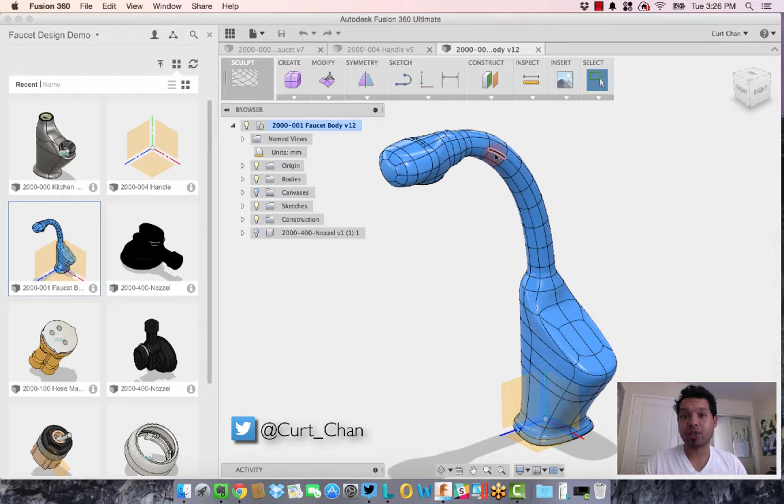And with that, I want to continue on with my faucet design. If you missed the first segment of how I created this sculpt feature, go ahead and click the link at the very top and you'll be able to see the first part to this faucet design. So let's go ahead and jump right in.

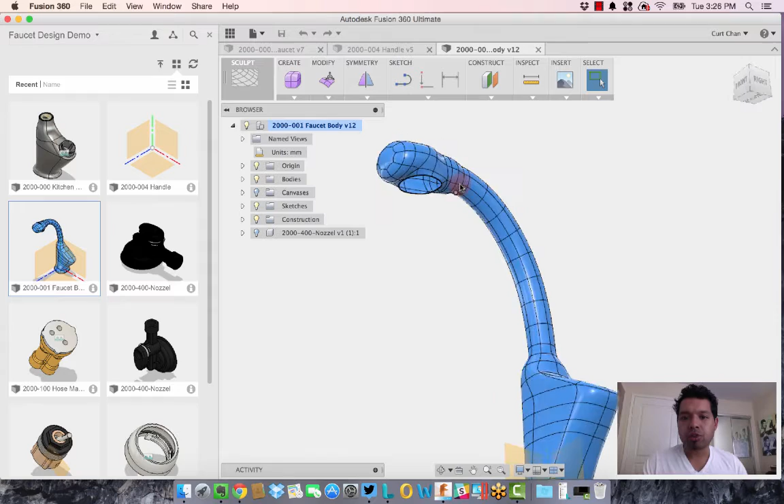Number one, if you guys remember, I made an opening at the very bottom of the headpiece of where the nozzle might go. The beauty about using Fusion is the ability to collaborate, and even open up multiple CAD files. In my folder, my project for faucet design, I actually have multiple components I'm going to be working with here. I want to show you just how easy it is to bring a component from another design or something you created in another file.

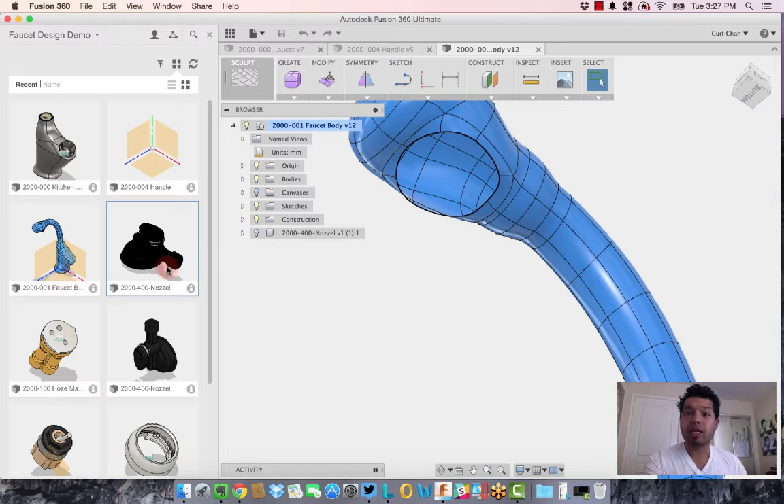All you got to do is right click on the design you want, say insert, and it's going to place this guy right in. Any changes that are made will update the version right inside of the data panel, so you always have the latest version there.

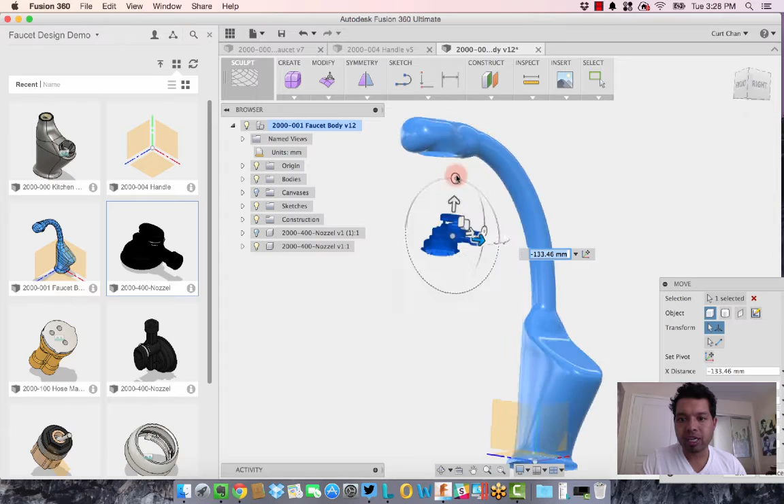So as you see here now, I just dropped this design that we have of the nozzle. I'm going to go and orientate it correctly of how I want it to be, because it needs to really sit right within this guy and hopefully fit snug right in there.

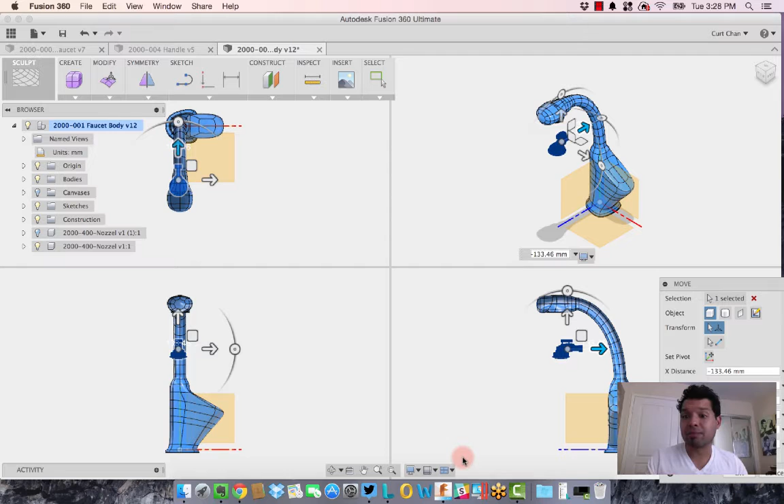Now there's something key I want to show you, and this came out with our latest release. I'm going to minimize the data panel. The slick thing is if you come to the very bottom where it says viewports and click on that, you can go to multiple views. This gives me a quadrant of 4 different areas, so I can look at the top, front, right, and isometric. The nice thing is I can physically zoom in and really take a look at positioning, seeing where this nozzle is in all relative space.

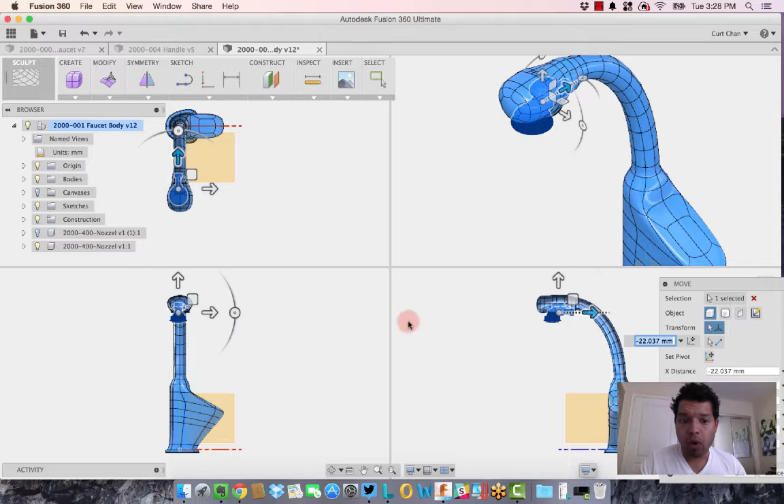So if I come to this bottom view, I can grab it, translate it, rotate it, get it positioned exactly how I want it to go. If I want, I can come over to another view, zoom right in, and we can see things are looking clean of how I want it to be. Pan right over, and really it's all about positioning.

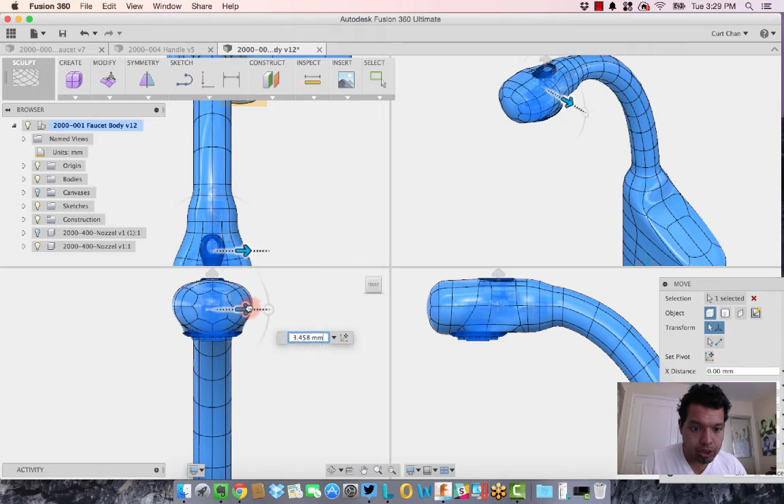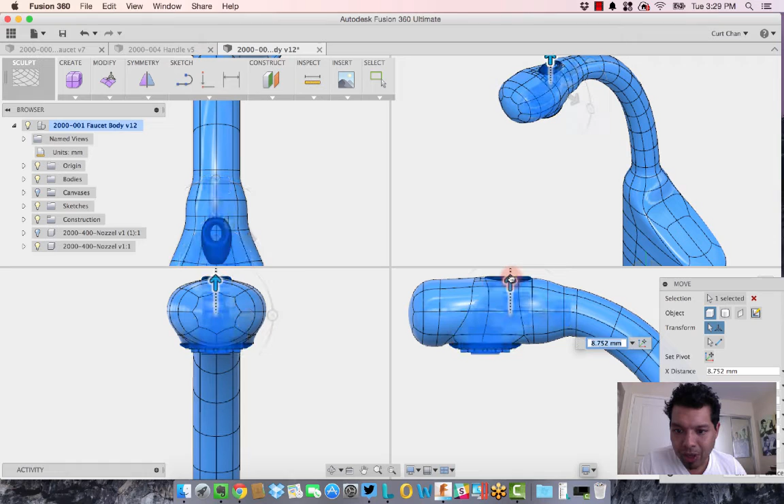So you can see it's kind of not centered, and that's the nice part about using the multiple view section—I can really see what's going on in all 4 views, and things are starting to look really good. Even if I zoom in on this area, it's not sticking out all the way how I like it. I can translate it up a little bit more, move it down maybe even a little further, however I want it positioned. Really it's just me playing the game of how clean do I want this guy to look at the end of the day.

Now I'm going to say okay and hop right back over to my viewport. One last thing before I hop back to the original one window—you see this little monitor where it says display settings. If I click on that, I can change the shade for each one, so I can look at it with no hidden lines, hidden lines removed, or shaded with edges, all depending on which angle or view I'm looking at, so it actually looks super clean that way.

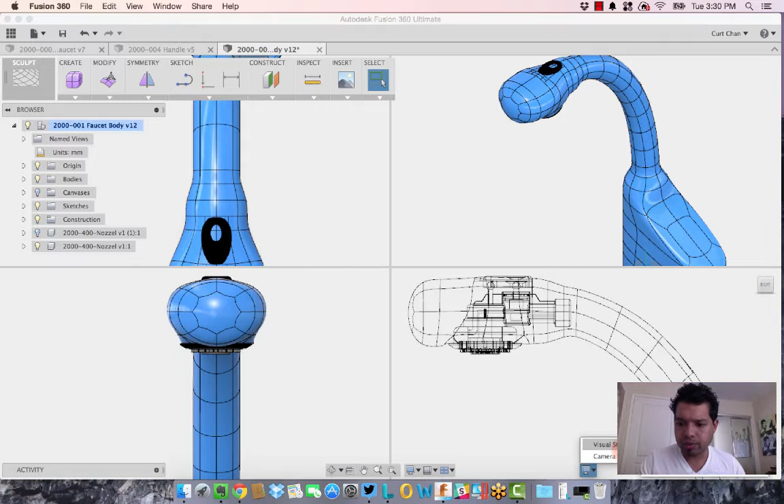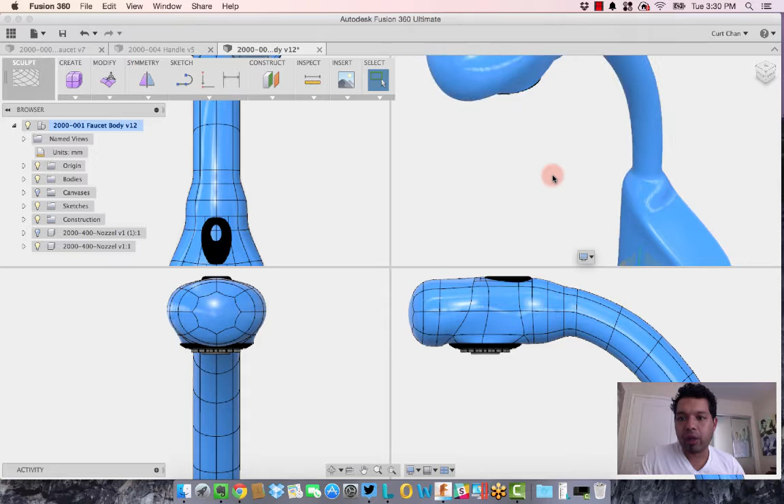Let me go back—I think I used shaded with hidden edges, there we go. Let's actually go with shaded with visible edges, that's the one I want. So now depending on which one I click, it activates that display setting. I can change the camera view, go over to perspective with ortho faces, and get it exactly how I'd like it to be. So just kind of zoom out, and it's starting to look pretty good right there.

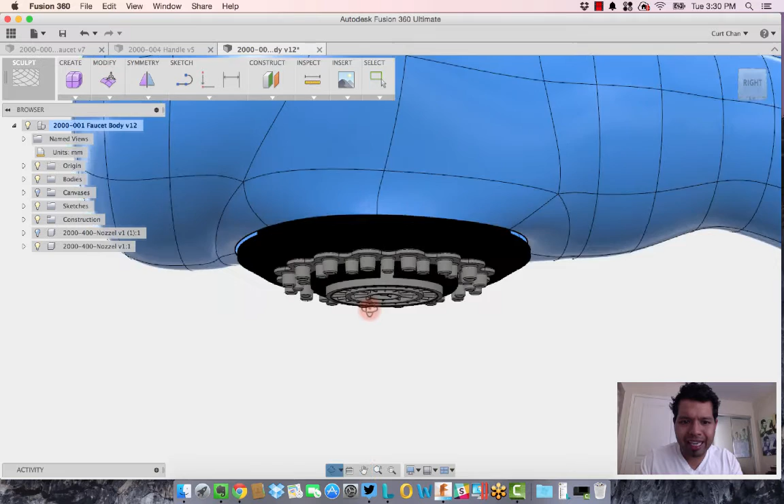So the next phase is just hopping back over. Let's go back to a single view, get that guy positioned how I want it to go. Let's take a look at the right view to see how this is. Zoom in, rotate around—see how there's kind of a gap in between the nozzle and the actual geometry. Since this is going to be a molded piece, and we used the sculpt environment to create the body of this faucet, I want this guy to really sit nice and snug.

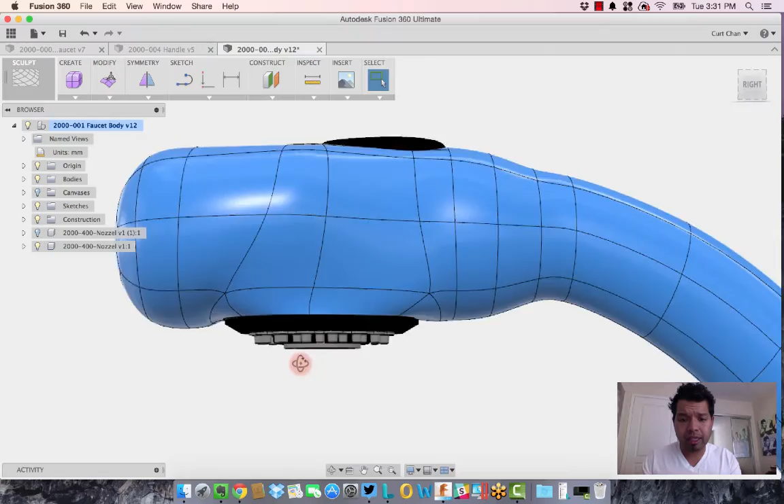Because when I industrial designed it, it was just kind of going with the flow of things. Now I actually have a component that I inserted, and it's not as perfect as I want it to be. So I'm going to show you a couple tricks in regards to working with the match tool, and we're going to take a look at it right down here under the modify command. The cool thing about this is I'm actually going to leverage the geometry of this nozzle.

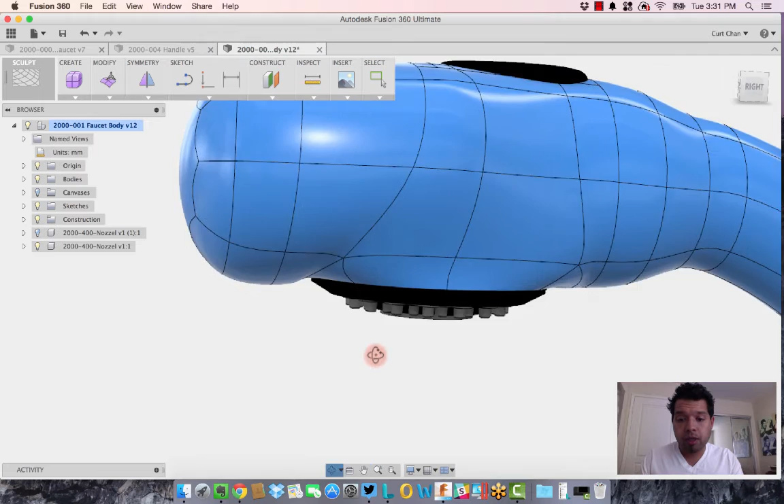So if I go ahead and create a new sketch, under sketch, create a sketch, I'm actually going to just pick this top outside face, or the top face of that nozzle. It puts me in the correct orientation that I want. Now the nice thing about this is I want that geometry.

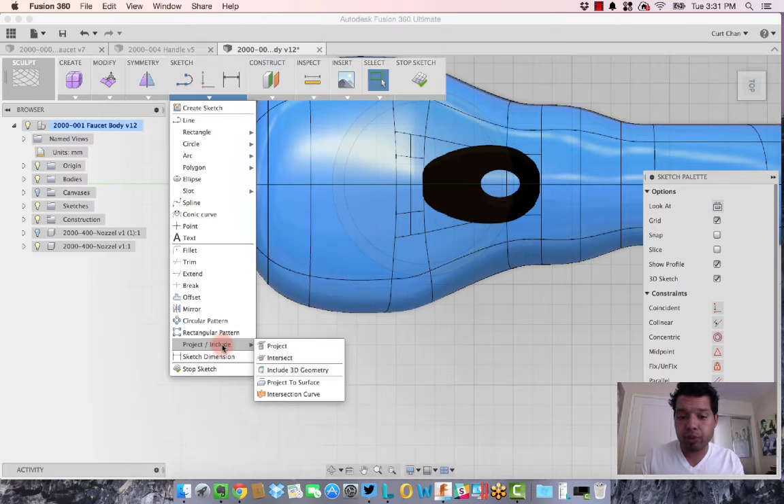So if I come down here under sketch, go to project — we've changed this around in the latest release — and just say project. It's going to take the geometry I have selected and project it onto that plane. Now if I go in and just hide this body that I have right here, and even hide the nozzle, you see how I have that geometry right there of that face I selected?

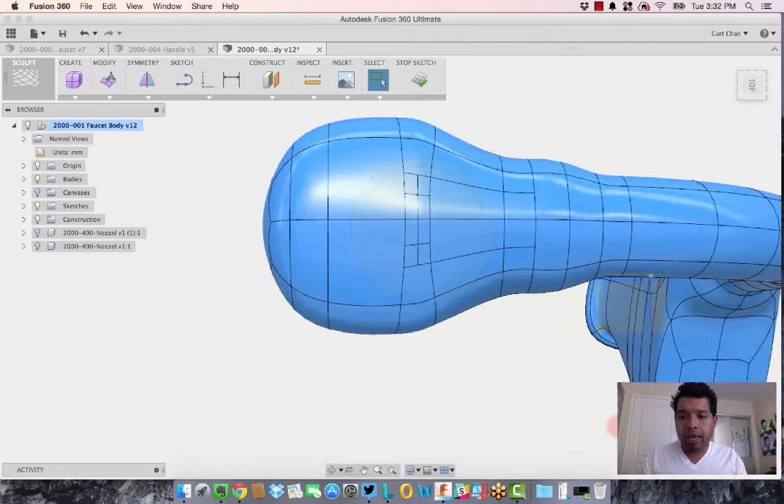Let me go and turn that body back on. And now if I rotate this guy around, you're going to see, see how I have the geometry and I can see that gap? Well, this is actually pretty slick, because if I come here to the bottom view now, what I want to do is kind of extend or match this outside edge to this outside profile.

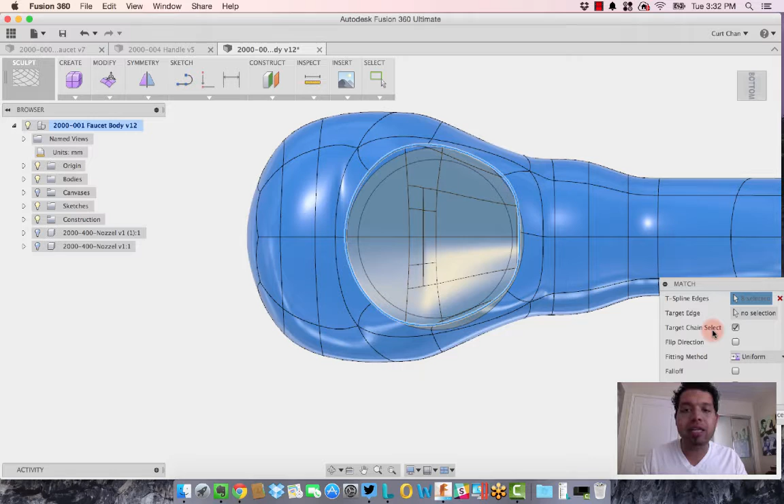So if I come up here to modify, drop down to match, what I'm going to do is select the T-spline edge. If I double click on that outside edge, it picks up the entire loop because I have target, tangent, chain selected. Then for the target edge I want to select the outside of this profile, just like that. Now it's going to match that outside edge to that profile I'm working with.

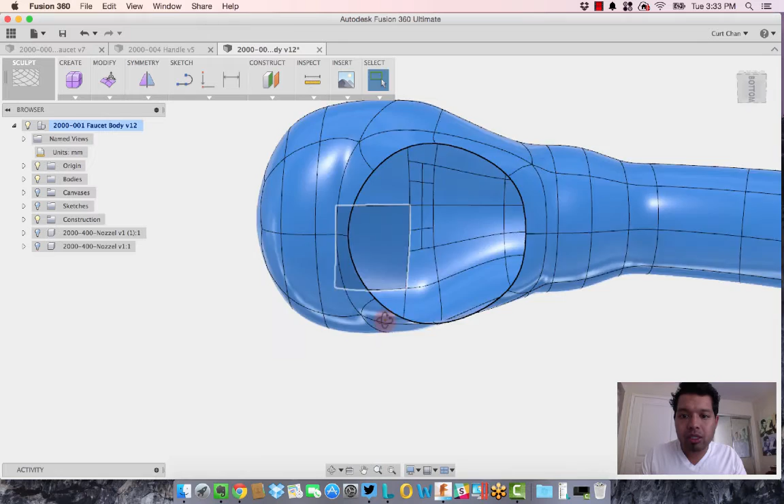So if I go in and say OK, now if you look at the geometry — let me turn off that nozzle so we can take a look at it — you can see just how clean that guy extends out to how I want it to be, so it's a nice snug fit. If I turn that nozzle back on, now you can see just how clean that is, all the way around, working with that match tool.

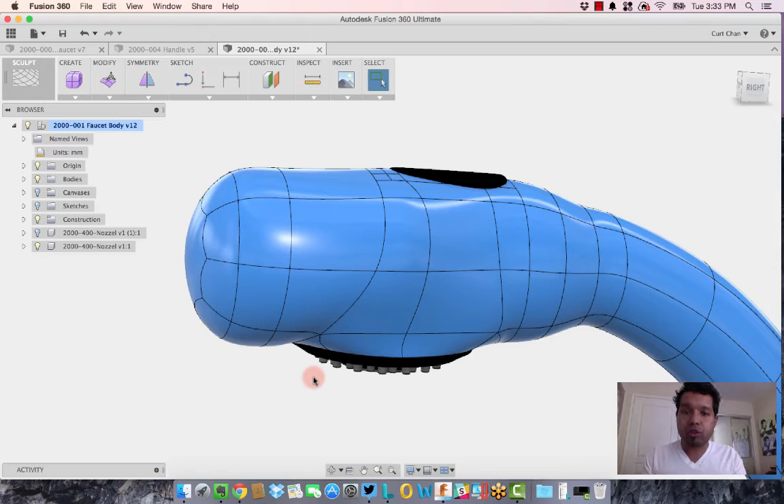So it's great to use to first start off with a sculpt design, then come in with another component, and then kind of get creative in that way. And of course, I can take that same approach at the very top for the top piece of the nozzle, using that match command. But let's go ahead and move forward now.

So if we go back over to my isometric view, let's take a look at it. A couple things too — I'm going to have to add a couple components here, and I'll hop over to that in a second. But the thing is this is still a T-spline body, because if I open up under bodies, you can see there's no thickness to this, right? So if I go under inspect, section analysis, pick that plane to section down, you can see there is no thickness to this T-spline.

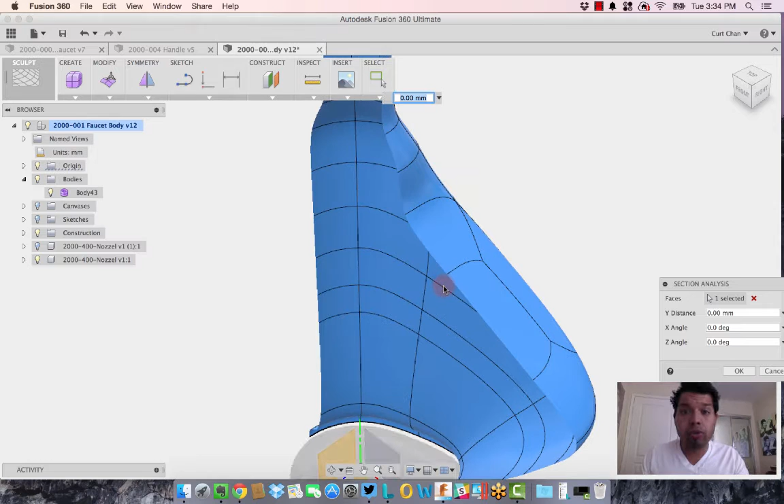And I need to give it some thickness as I add these components in. So what I'm going to do is escape out of this — how do I add thickness to a T-spline body? Well, number one, if I right-click on the body, come down to Convert, and say OK, now I converted this guy to a workable surface rather than a T-spline body. But this surface now doesn't have any thickness still.

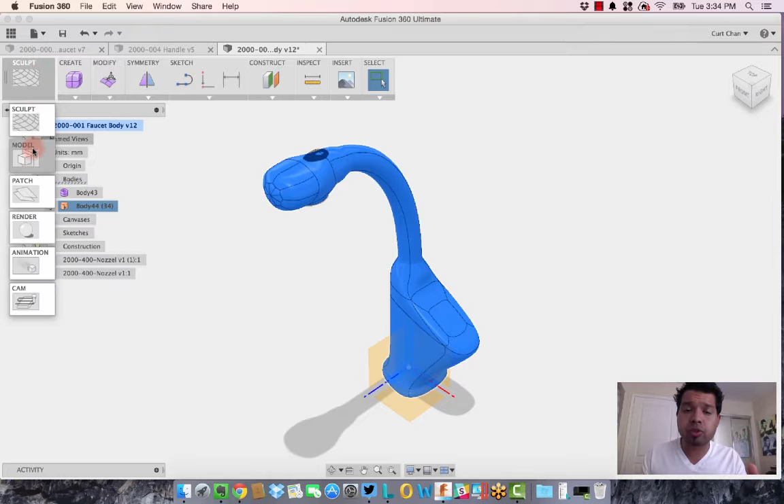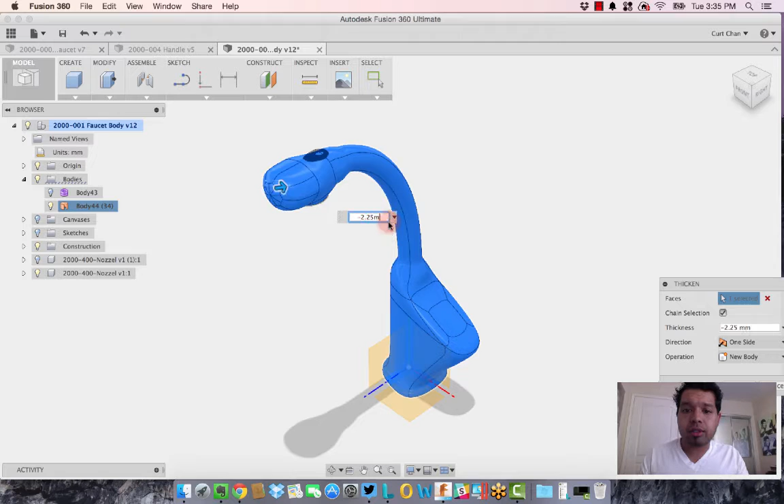So what I need to do is come back over to Sculpt, drop down to Model, and come over to Create — there's something called Thicken. So we're going to add thickness to the surface. All I'm going to do is select the body that I want, key in a value, just like that, give it a thickness, and let it go ahead and crank that guy right out.

And then what we're going to do is hop back over and do a section analysis so we can see exactly how this is going to look. What is it doing specifically? It's going to add a uniform thickness all the way around of 2.25 millimeters.

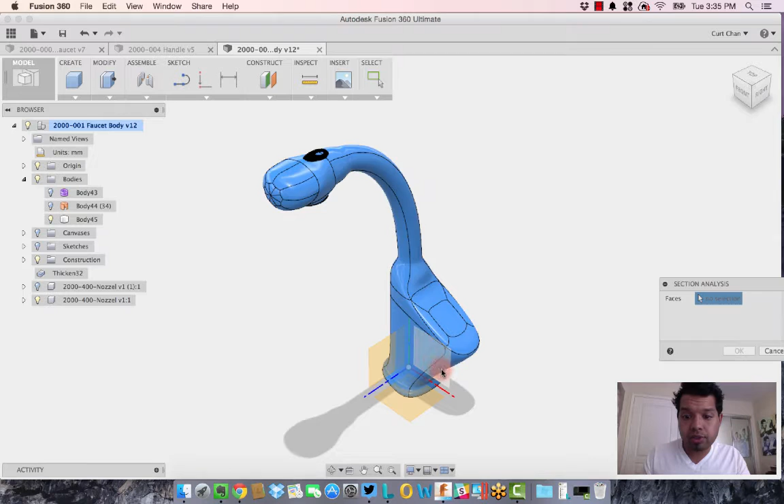So if we come back over here to section analysis, grab that guy, go back to the front view. Then there we have it, because we're now going to add some components, build off of it, and create kind of a circular piece that we can screw on some of the components that sit inside, and then design a handle as well. Let's go and take a look here.

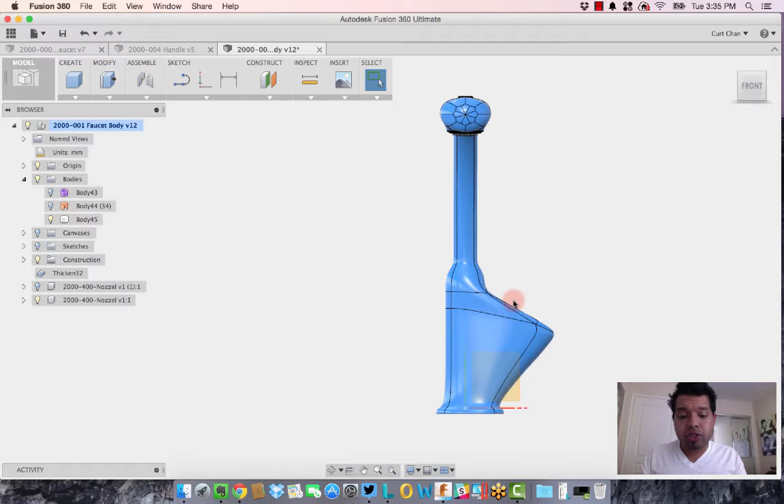So go and cancel out of that. You notice that this is all still one body in itself. One thing to do if you have just one body and you want to split it, is if I just go ahead and create an offset plane here, I'm sure going to have 3 bodies, so I can just extend this guy up. Maybe I'm going to split it right here, at the bottom of that neck, because I'm going to have 3 components that are going to be molded. We'll split it right here, and let me show you how to split this body.

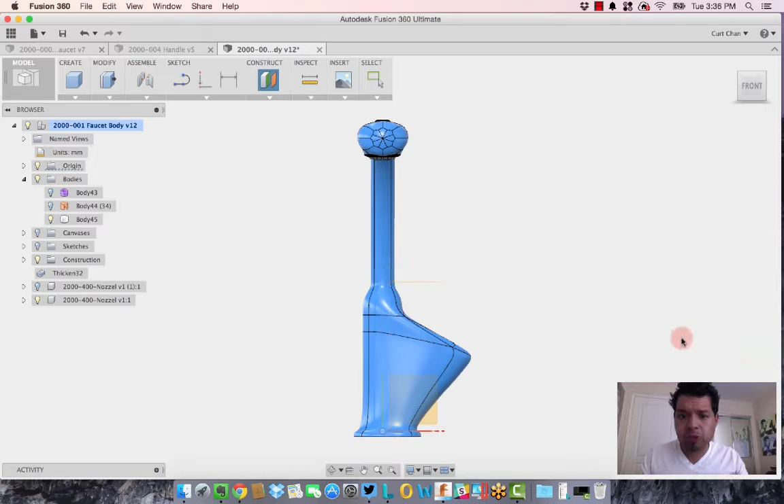All it is, coming over here to Modify, come down to Split Body, and now I can say what's the body to be split—this guy. What is the splitting tool? It's this plane, and it splits it right down the middle. So now I have two bodies that I can turn on or off, and you can see I got my component here, I'll turn off as well.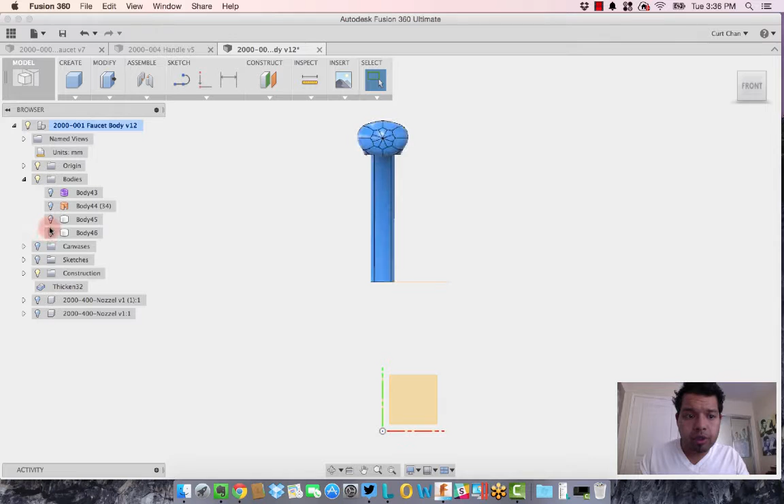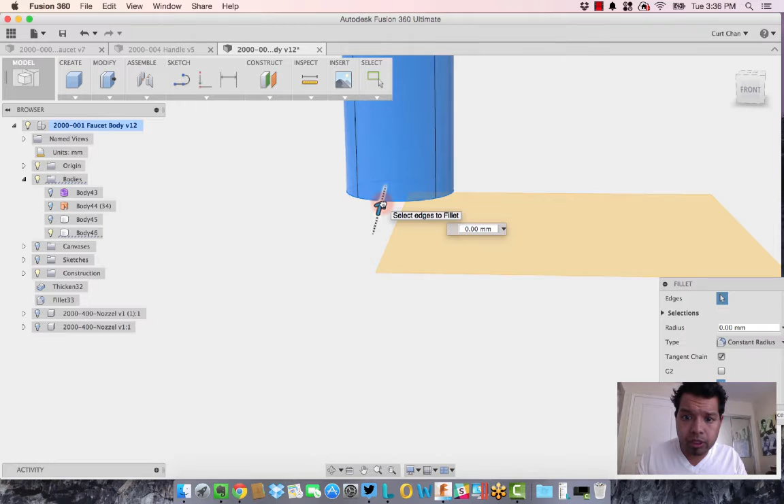But if I turn on the bottom body, I can now come in and add maybe a light fillet there if I want. Right click, use press pull, and just come in and drag to add that small fillet at the end. Even take that same approach on this edge too, doing a small fillet to make things look really clean, because as those two come together, stick with that.

There we go. Now it's kind of taking shape, right? So as we look at it, I got my components. Talked about the match tool, talked about splitting bodies, as well as thickening, going from a T-spline to a B-rep to now a solid piece of geometry, a solid body.

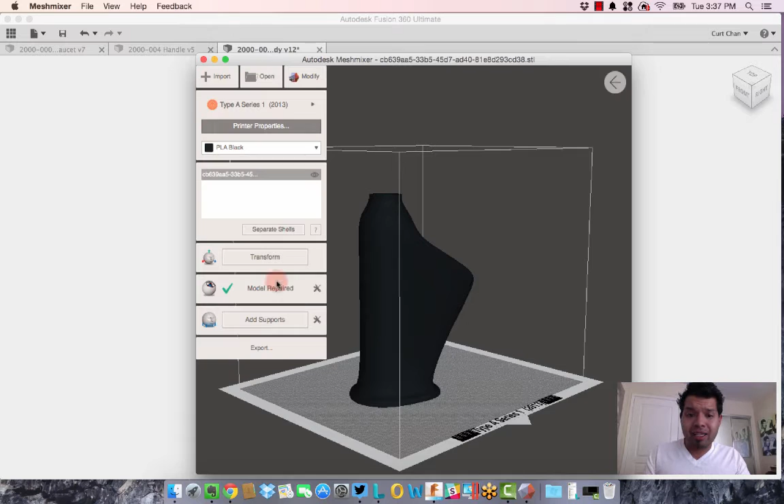Now technically I can actually right-click on this body, go here to save as STL, and if I come on over to use Meshmixer, now Meshmixer is going to launch, take that STL that I have and drop it right in Meshmixer, and now you can see it's positioned.

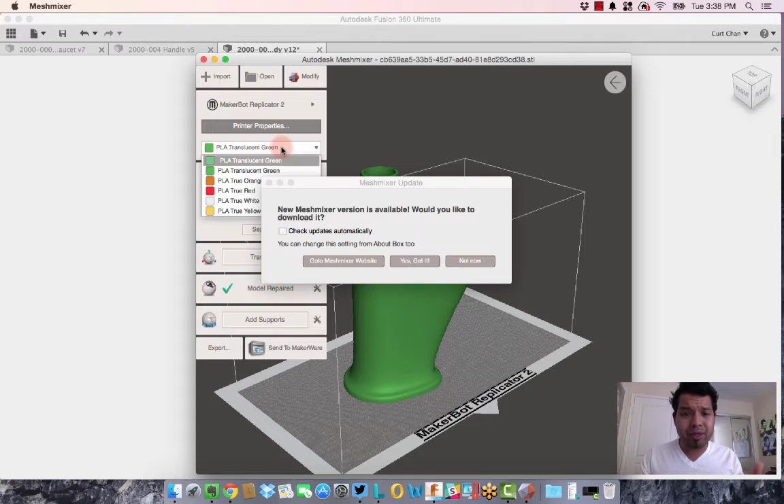I can now really using Meshmixer come around and kind of do all the different layers, change—I'm using PLA black. Let me go with natural so we can see a little bit better, but I'm using a Type A series, or even if I want, I can grab a Stratasys Fortus or even a MakerBot Replicator 2. A little too big for it. Probably the Type A was the best one. I can always close this update out, but I can always scale it to change the size.

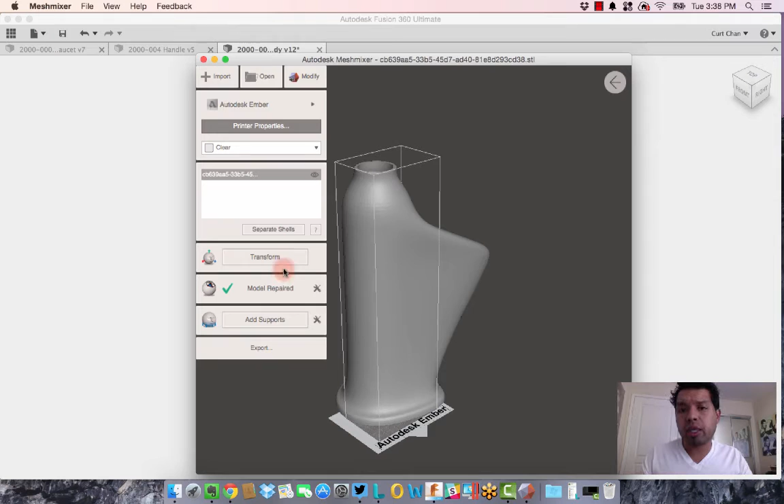But we have a Type A printer, which is another great printer, even the new Autodesk Ember printer. So of course it doesn't fit within that build, we want to shrink it down, and we can do all that stuff right here within Meshmixer itself. So some things to keep in mind, I'm going to exit out of Meshmixer—it's that integration between design, fabrication, prototyping, additive manufacturing, just right there, right click with one click of a button.

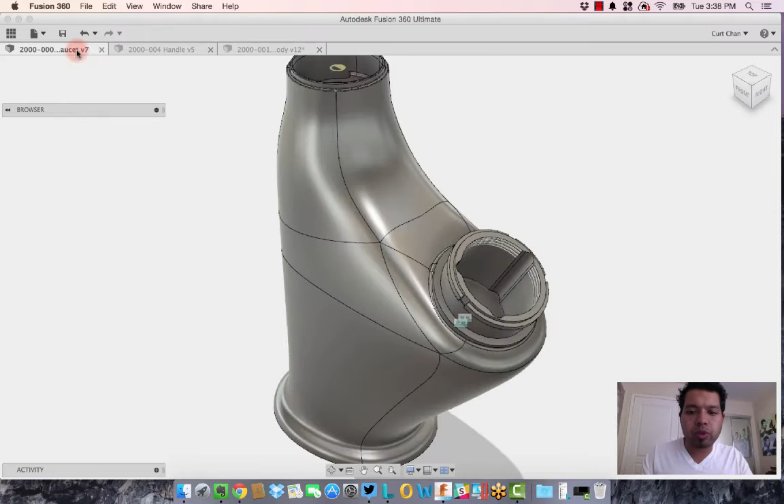So let's go ahead and move forward. And what I did just to speed up time, I designed this top piece, and I want to show it to you here. I kind of designed this piece here to where all the components are going to sit, and all that was just a sketch and a revolve feature, and I added some threads.

But I want to show you how we continuously work in adding components. So the insert components, once again, if you remember, come over here to my data panel, and all I have to do is just find the one that I want, the component that I'm working with. And the nice thing too, it doesn't matter if all this stuff was designed in Fusion or not.

I can go ahead and work with maybe other team members that designed the hose portion of it, then the nozzle, and then maybe the headpiece or the handle, and we're all in this same project. Then I can just import their designs into my design, and have mine as the master design here. So something to keep in mind about the collaboration avenue too.

If I ever want to take a look at how this is, or how many revisions I went through for this hose, I can just click on the little i, and it says Open Details in A360. So if I click on that now, it launches a web browser, and from there it will bring me straight to the A360 page for this specific design, and brings up a 3D model.

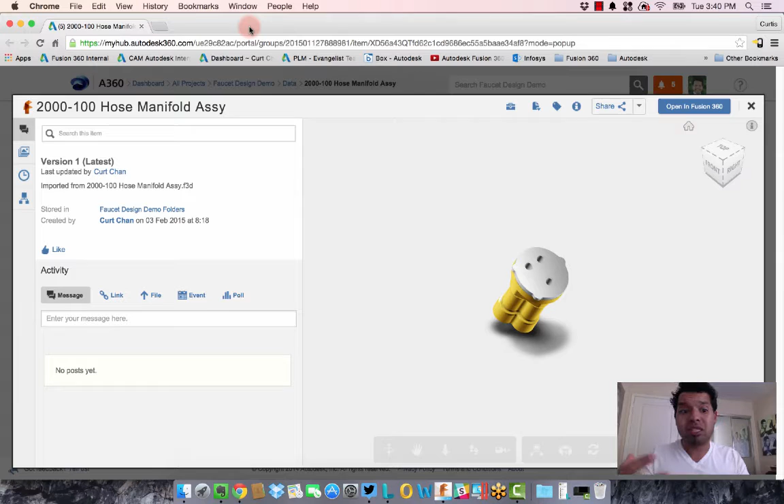So you can see right off the bat the process we're going through here. Not only from inside Fusion, I can access all my designs through A360 and see the collaboration. Someone else designed it, and I can leave some comments here. I can move this model around, get a great view of it, and take a look at all the renderings I have.

So just a couple things I want to show you guys in regards to not only design, but Fusion as a portfolio of additive manufacturing. Collaboration is really key, and that's a lot of the value at the backbone of A360 and Fusion. So enough about that, I'm going to exit out.

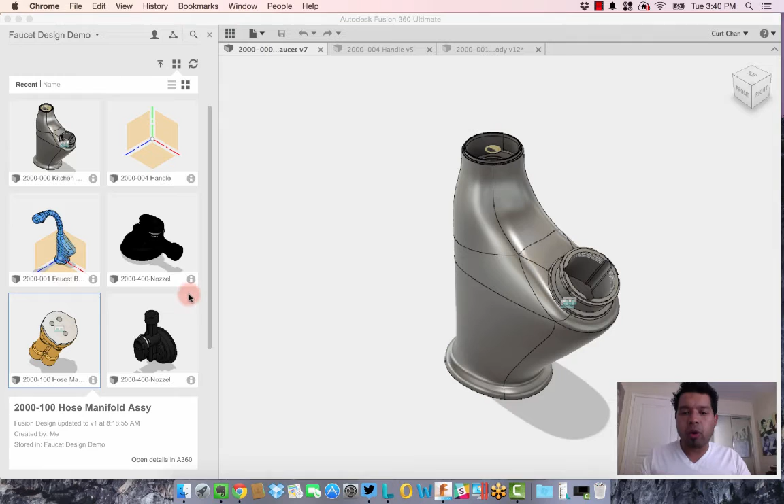Let's talk about components, right? Inserting, right click, say insert. Go and just insert that guy right into my design, and we're going to have that guy pop right in.

But now let's talk about applying the joints. If you haven't watched any of our additional Autodesk training material for Fusion on our YouTube page, we have a whole lesson on working with joints. But let me give you a quick crash course here.

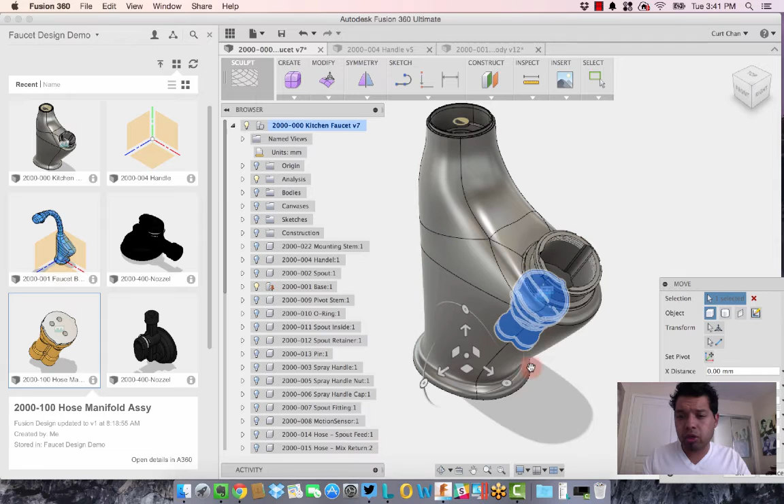I'm just going to use the drag to move this guy out, and all we're doing is just a basic move. And then now it's really coming in and saying, hey, you know what? Let me come back over here to Model, drop down, close this data panel, and click the Rubik's Cube icon at the very top for Show Data Panel.

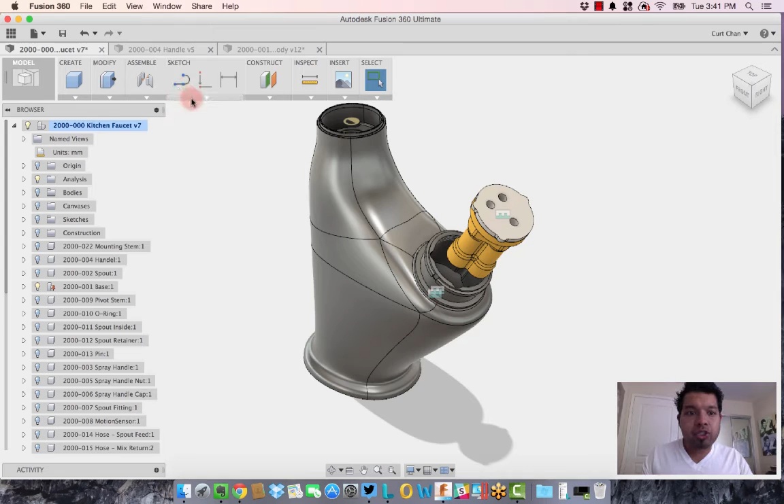And now it's just coming over to Assemble, Joint, and saying, well, what do I want to do? Well, I can pick this outside edge, for example, if I want. If we zoom right in now, how do I want it to go? It's going to get positioned right here to this inside edge, and it's going to bring it right down. Go and say OK, and now that piece has been inserted.

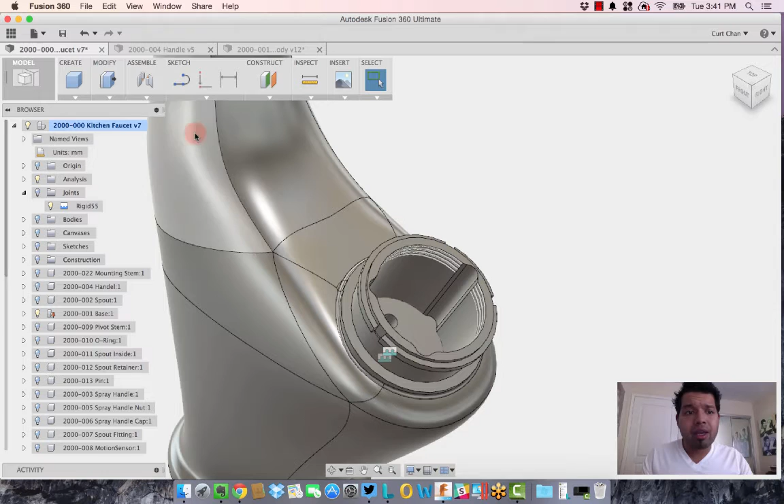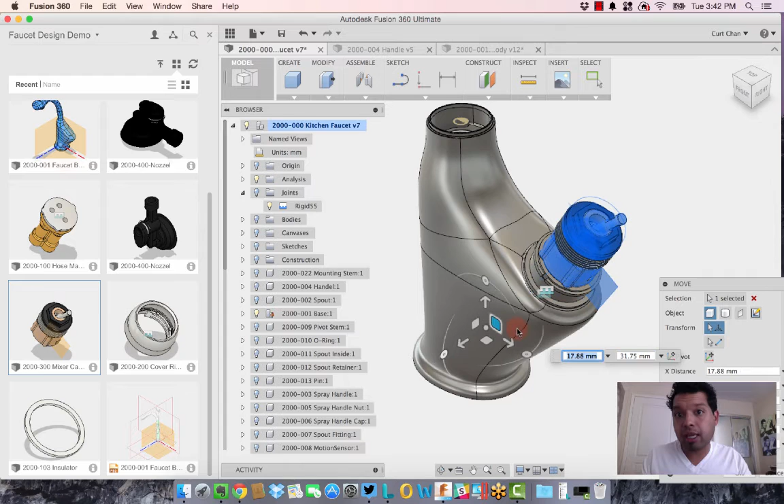And it's just going piece by piece by piece, right? Going back to my data panel, grabbing the components that I want, closing this guy up, right click on this guy, say insert geometry, and now it's going to take it and insert it right into my design. I can move this guy right out just like that and take that same approach. So coming back over to Assemble, come down to Joint.

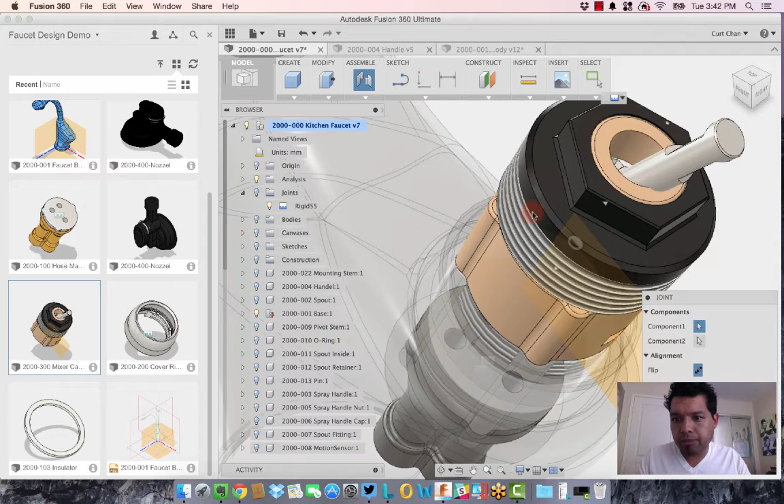Let's talk about some of these joints. You see by default it's rigid. I wanted to just walk you guys through a couple of these too. So if I click on this component, let's go with, for example, this outside component here. As we scroll through to now the inside, maybe around here, it's going to bring that guy all the way down. I can say rigid, which is just going to mate it to those faces.

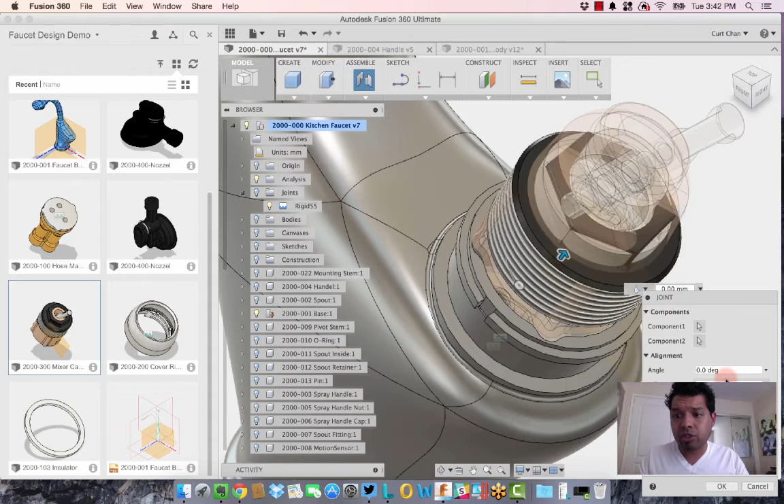Cylindrical, which moves it up and down that axis. You get into revolute, which is going to rotate it along there, which gives you some great feedback. So just some key things to keep in mind: I can change the rotational axis, Y, how do I want it to rotate along, which is not what I want there, but Z as well. That's the axis I want it to actually turn out of. So it depends on what you want.

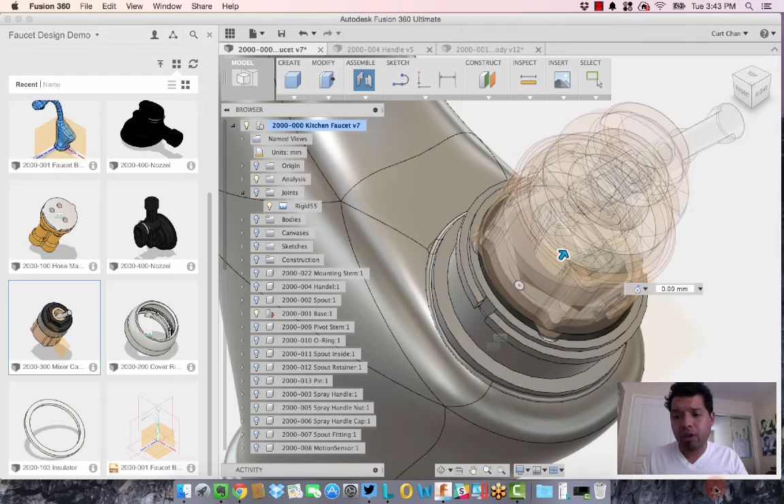And from here now, what you're seeing is, go and hide that plane, now I'm getting those components all situated. And I got to probably now design that handle at the very top and then insert it into here. But the thing about designing is that sometimes you might have multiple iterations or just multiple design ideas of what you want, and that's one nice thing Fusion allows you to do.

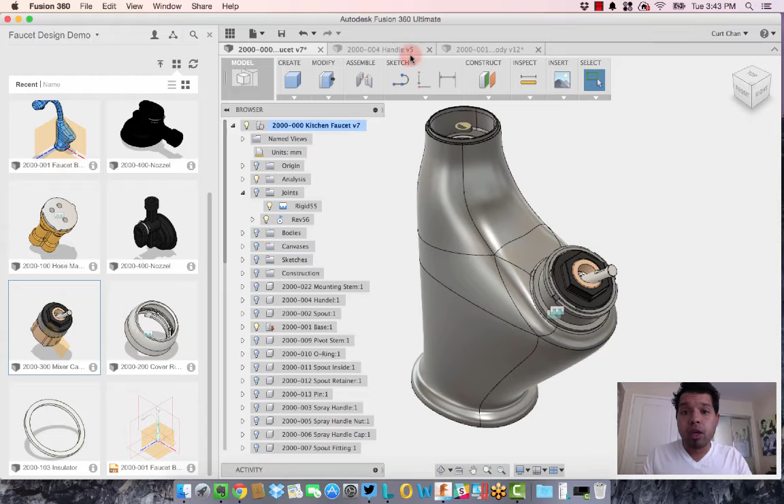So what I did is I have this handle, just created a new document, closed this guy out, is I like to go through a couple different design iterations. So for example, if I go up to Box, or actually using the Sculpt command, come down, instead of doing a box I'm going to go with a Quad Ball, which is actually pretty slick.

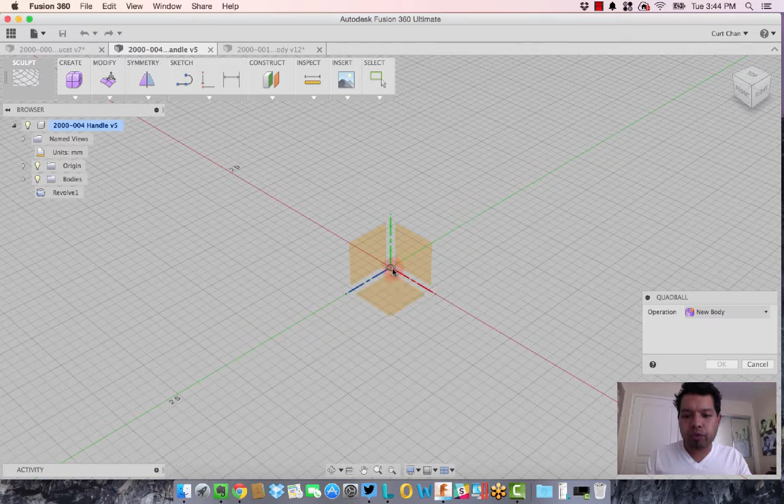So if I click that plane, drag out, let's go with maybe, I don't know, let's go with 75 millimeters for that size, just like that. Kind of zoom out a little bit, and there's my quad ball. Now it's just manipulating things to kind of create that handle.

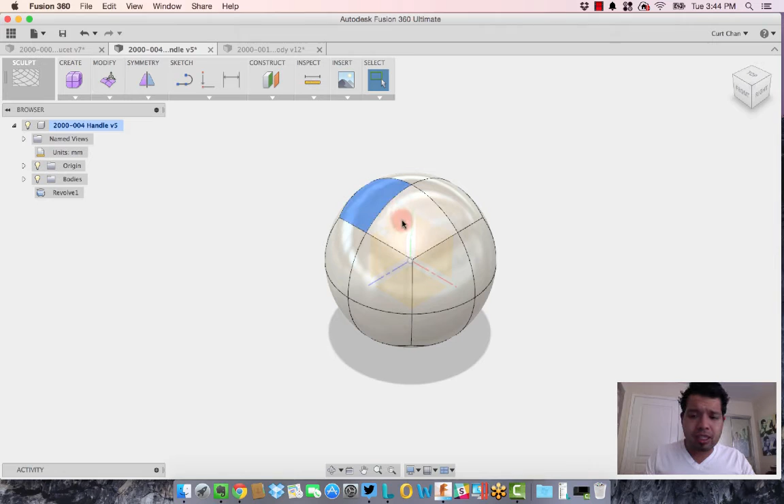The nice thing is that if I'm just going to go and select a couple faces, holding down the command key or the control key, right click, use Edit Form. Now once again, if I hold down the alt command, or FN option alt, which is mine because I'm running my MacBook today, if I hold down that, it adds more geometry just like that. So I can extend that guy out to add a little bit more.

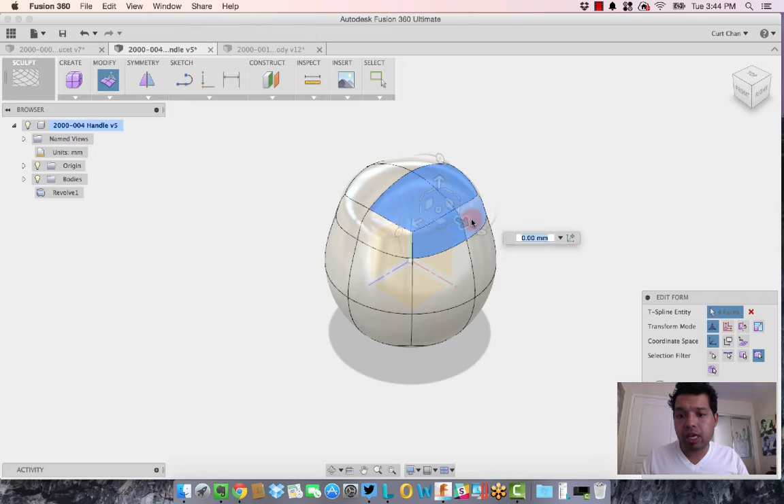Once again, I can come back over, maybe grab these faces right here, multiple, select these guys, hold down FN Alt and kind of drag out. Now I'm starting to sculpt this handle that I want for my design, just roughing things out.

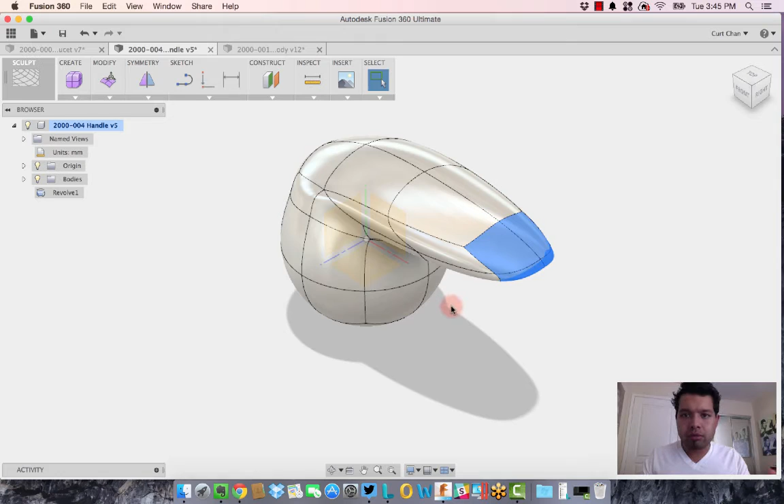I can play with the triad to narrow things, make it a little cleaner, and I have one design that I like. If I want to see different looks, all it is, double click on that body, Command C or Control C, Command V for paste, and now I can go through and start making multiple design changes.

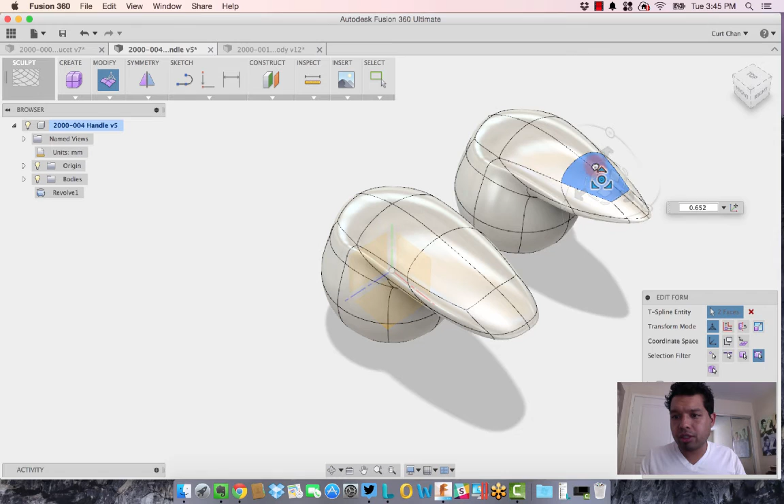So let's say for this one, I specifically want to come in and grab these tips, edit form, make this one a little narrower for this second design. Even grab some of these faces, for example, and you can see depending on how I want things to look.

Go through another design, Command C, Command V. This is what Fusion is great at - quick and easy to come up with multiple design concepts. It's all about conceptual design sometimes.

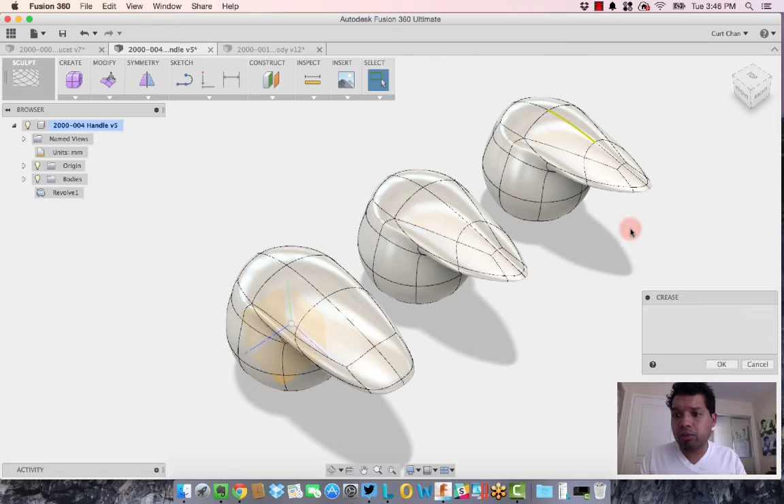If I want to grab this edge, right click, try the crease command to add a little more cleanness there. Let's see what happens, see if it's getting the geometry that I want. You can see that kind of dimple right there at the very top, comes to a nice sharp point. Sometimes you want to see that, have that effect.

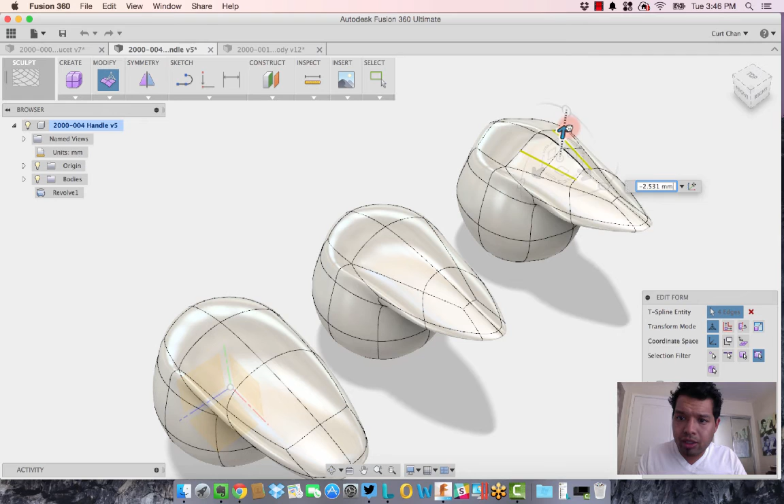Or even take some of these faces at the end of the day, and let's say I took this face, Command C this face, right click. If you guys don't know about subdivide, it takes a face and breaks it up, so I have more T-splines to work with. Meaning I can grab these edges, command select, edit, and really start tweaking to get cleaner geometry if I want, just like that.

So quickly going through different design iterations in that fashion.

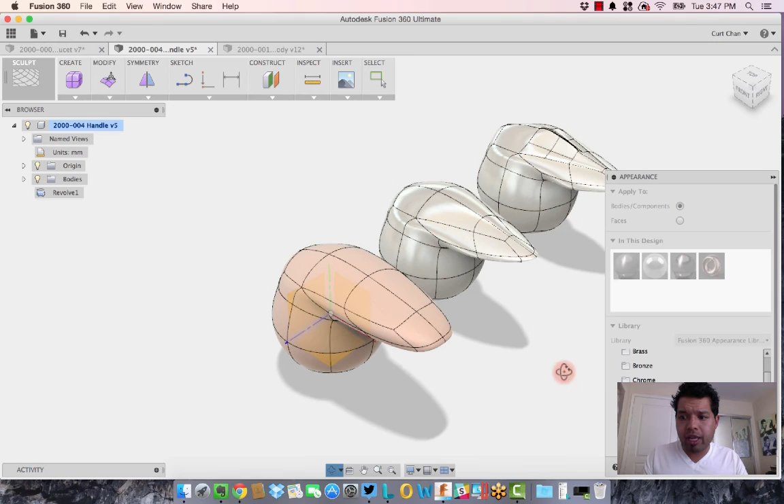Right click if I want, go to appearance, and start adding some different colors that I might want to work with for metals. If we do a copper type look for this guy, now I have that, go with a copper polished here, and then even get into nickel. So we give you all these materials you guys can work with.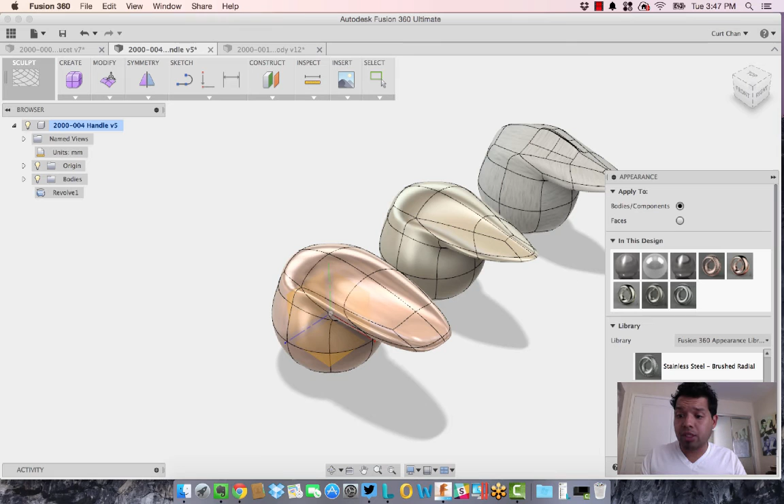You can get into stainless, which is always beautiful - a lot of stuff is made out of stainless for consumer products. That one doesn't look too clean, of course, but let's go with satin. I like that, you could sit here and play with this stuff forever. And even if this doesn't look too good, see even from the reflection, that's the whole point here.

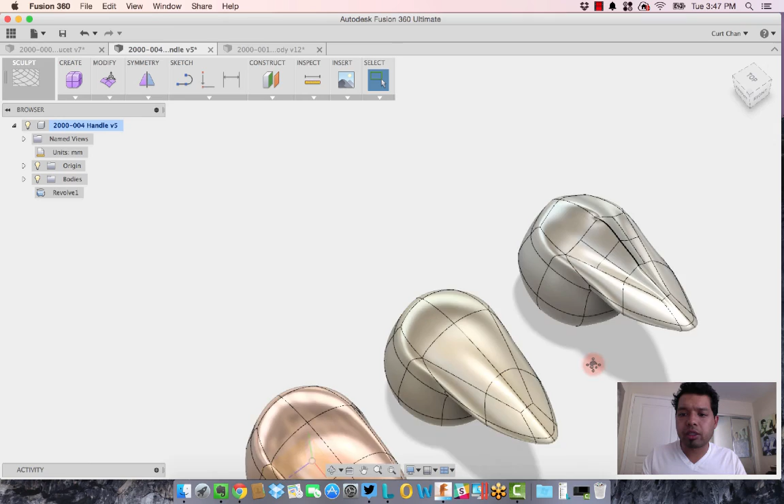I mean, it's coming in. Let's grab that point, edit the form. We can maybe grab this guy up, pull it back out, and have it look a little cleaner. Now I have some hard clean-cut edges on this one, and then just a fatter one and a thinner one.

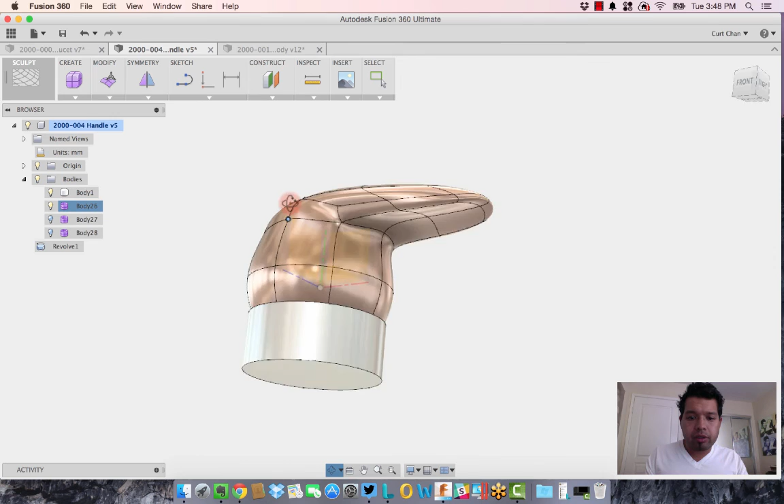And now too, one thing I like is if I just want that body - this is my main one. What I did too is I'm going to turn off some of these other bodies. I created this, basically, if I turn this off, just took a revolve feature, and what I'm going to do is a Boolean operation, so the peg is going to sit within the faucet and fit all nice and snug. You'll see what I'm going to do here.

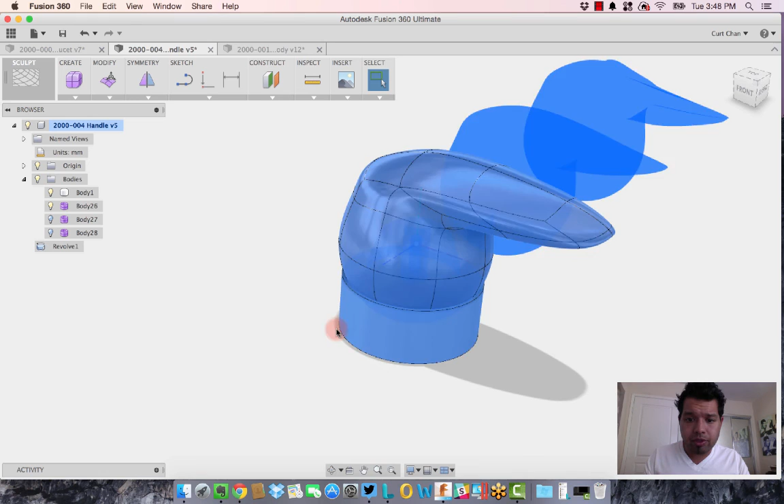So if I just turn this guy back on, the original body that I was looking for, I can grab this guy, for example, and just move it and have it positioned how I want it to go, just like that. Now come on over to Model, drop down under Modify, go to Combine.

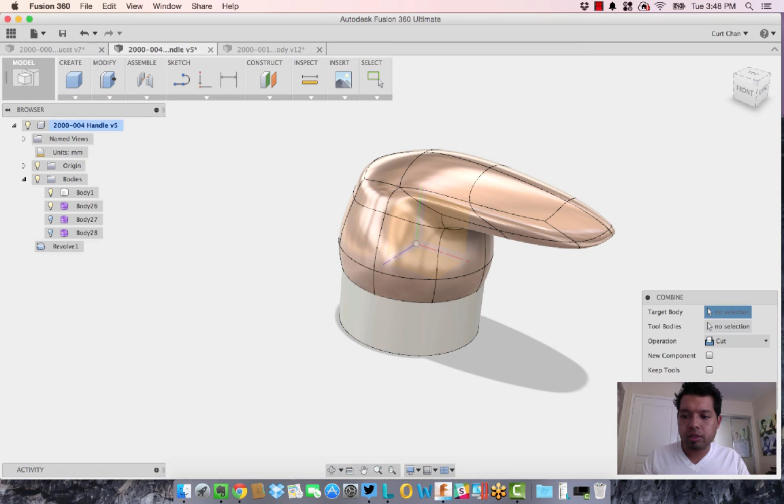This is my target body. Oops, not going to join, going to cut. Actually what we've got to do is convert it, right, because it's actually a surface. So come on over, right click, convert. There we go. Now I've got two bodies, right, to do the combine feature, Boolean operation.

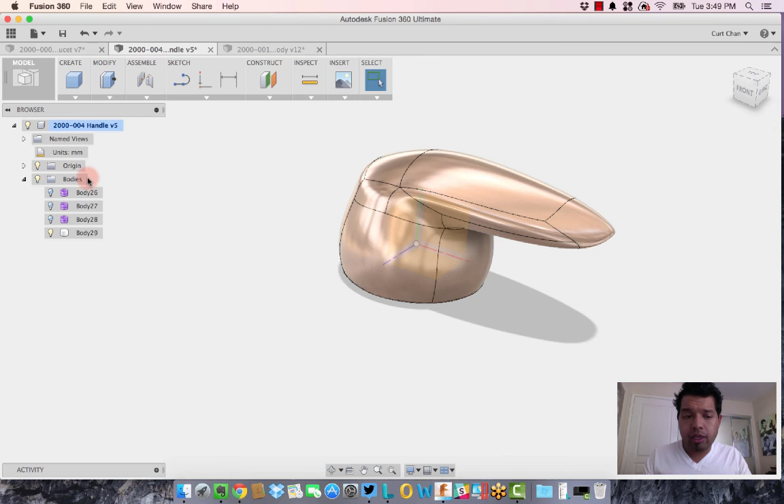Drop down to combine. This is my target, this is my tool body. I don't want to join them, I want to cut them. Say OK. And then now see how it created that nice feature? So now when it sits within that handle, it's going to fit all nice and snug.

So with that said, hopefully this gave you guys a great look at continuing forward on the faucet design, adding some components, using the match function within the sculpt command, as well as doing some conceptual modeling in itself, and taking a look at A360.